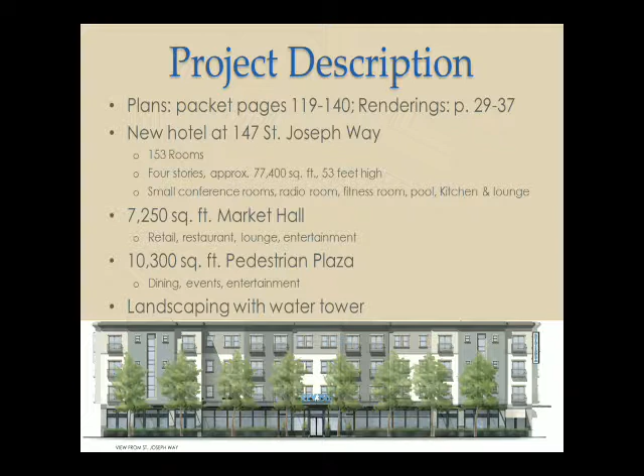The project provides parking for 167 vehicles. I should say there's 166 parking spaces out there right now associated with the Park and Ride. It will replace 30 of those Park and Ride spaces, and the parking is landscaped with shade trees and screening shrubs to prevent visibility from the roadways and public ways, and is implemented with water quality BMPs throughout.

Also, the project involves reconstruction of St. Joseph Way to conform to city design standards. It would include sidewalks and streetscaping on the hotel side of the street. It will include parking for 16 vehicles, and though it's not really part of St. Joseph Way, at the western terminus of St. Joseph Way, there's a wetland water quality interpretive area being proposed.

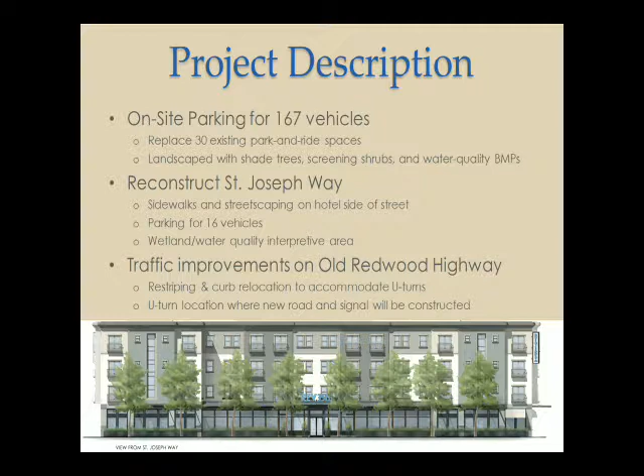As well, there are some traffic improvements on Old Redwood Highway. Part of reconstructing St. Joseph Way, as proposed, there will be a turn median where it meets Old Redwood Highway, which would allow left and right turns in, but right turns out only, so only southbound travel onto Old Redwood Highway. To allow for some northbound traffic, we've asked them to include a U-turn, and this would be at the location where there's proposed to be a traffic signal, and I'll show you more of that as we move on.

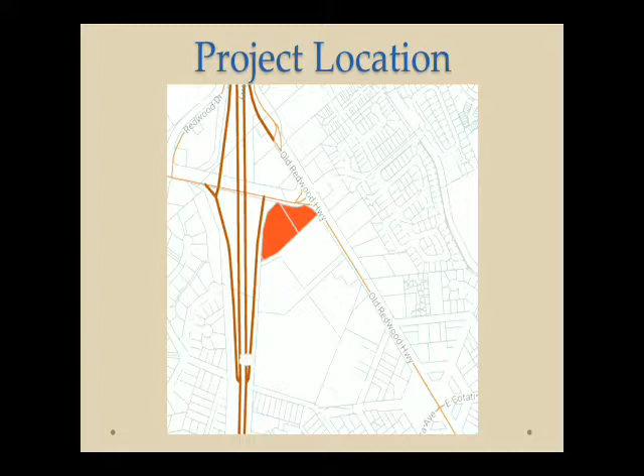So that's where the project is located, pretty much the southwestern corner of Gravenstein Highway and Old Redwood Highway. This is a view looking south, but it also shows the parking lot that exists and kind of the heavily compacted area off to the left in this aerial.

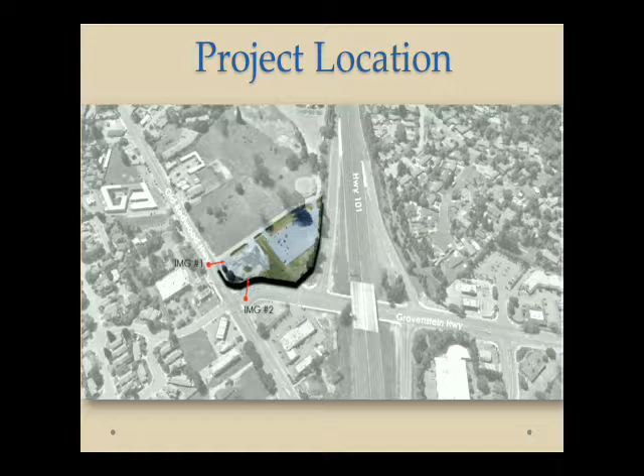Today, in this image, basically what you can see is there's two major lots, and a tiny third lot, a small triangle about 450-500 square feet in size. The majority is covered in asphalt with the park and ride lot, and the far right side is all denuded gravel. That's an old site, used to be a gas station, and Tubby's Restaurant was there. Since then, all those tanks have been removed, remediation has occurred, and the site's been cleared. But currently it's vacant, used for a Christmas tree lot the last few years.

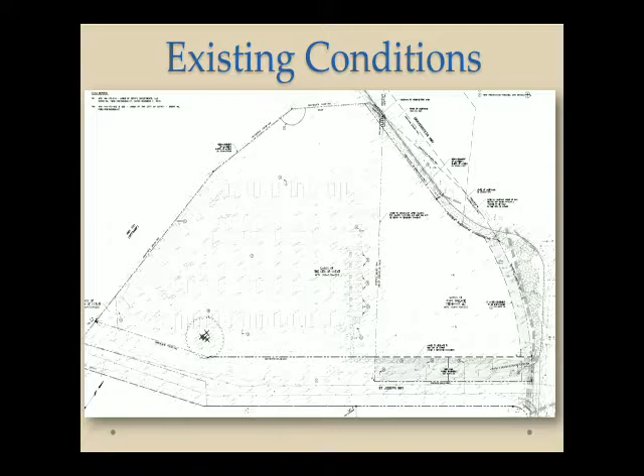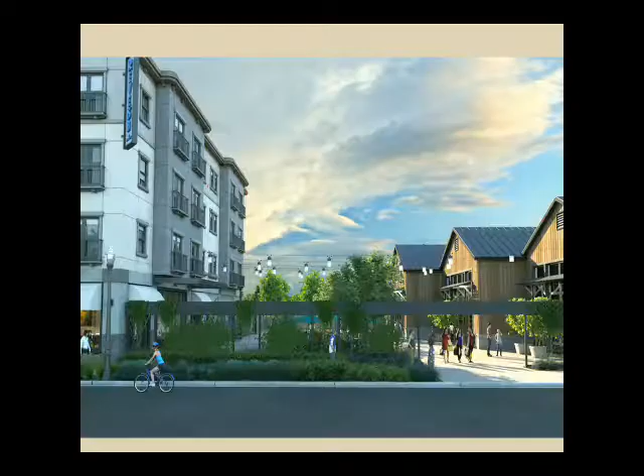This is a rendering submitted by the applicant. Basically what I'm trying to show here is how it would appear as if you're on St. Joseph Way. It has active ground floor uses in the hotel, and the market hall also has active uses such as restaurants and retail. This is precisely what's called for in the DSP, and the pedestrian plaza is also an important component of what the DSP is looking for, and that's pedestrian-oriented hotel development.

When you look at the hotel in this part, you can see some of the architecture. It's flat-roofed, uses offset planes, a series of colors, and decorative windows, and all these things help to break up the massing of the building. The barn-like structures are distinctly different, but complement the building because of the historical features utilized in the hotel itself. Also, the cornice of the hotel is done in a way reminiscent of turn-of-the-century commercial buildings, providing an attractive top to it.

Access to all of the market hall is from within the plaza. That's the way you will access those buildings. As well, from the plaza, you can access the hotel.

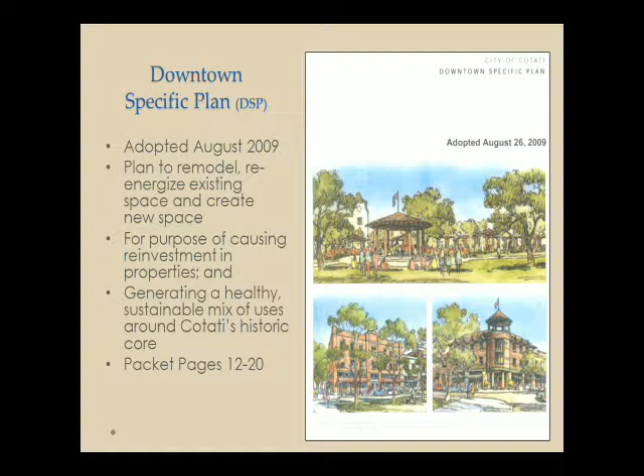Within the downtown specific plan, there's 4 planning areas. There's a historic core down to the south. There's La Plaza, around La Plaza Park. The Commerce Avenue, which is all the way to the north of this site, and then the Northern Gateway, which is this particular site, which this site is within.

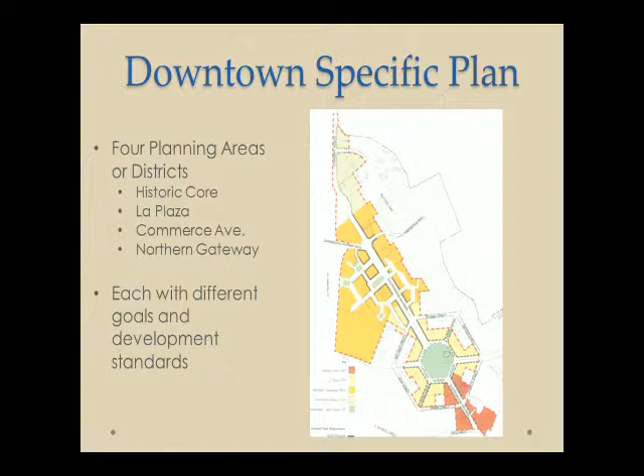Each of the different areas or districts have different goals and development standards. This one is located in the Northern Gateway. The focus, according to the DSP, is for regeneration. As I said, this once was a used site, so it's to reutilize the sites, and for revenue generation.

It quotes this: the DSP is saying this area of the plan presents the largest contiguous opportunity for a substantial revenue stream. It transforms underutilized land into a mixed-use district.

Two primary goals are to reconfigure Old Redwood Highway into a vibrant mixed-use, multimodal, and beautiful urban street. And lodging, again, is specifically called for in this district. Develop pedestrian-oriented hotel with active ground floor uses, capture sales and hotel taxes. Some of the key development standards: the maximum height allows 4 stories and has a 50-foot limit.

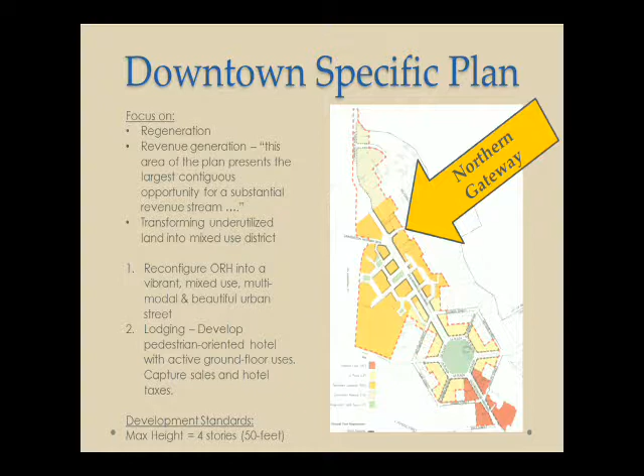Part of this proposal tonight, we're going to be talking about variances or considering variances. There are 2 variances that this project would require. One is to the block length, and we'll look at that in a moment. The DSP establishes a maximum block length of 500 feet. As proposed, the block length, the way it's calculated, is 570 feet.

And in this case, a mid-block road connection—let me just go to this next slide. But in this case, this mid-block road connection is not something we want. If you look at this site plan, there's no way to run a road to connect to the 101 off-ramp, or the Gravenstein Highway. Neither of those connections would conform to Caltrans roadway standards, nor would we want to run a road through this development.

To do so would significantly diminish the good assets of this project, including the plaza and the market hall and the pedestrian flow that it creates. That said, the pedestrian plaza does actually create a connection between Gravenstein Highway and St. Joseph Way. So the block is interrupted by a pedestrian way, which is, I think, just as valuable as interrupting the block with a road.

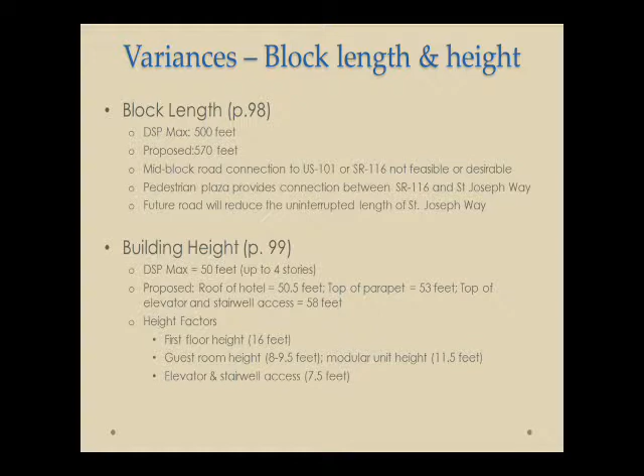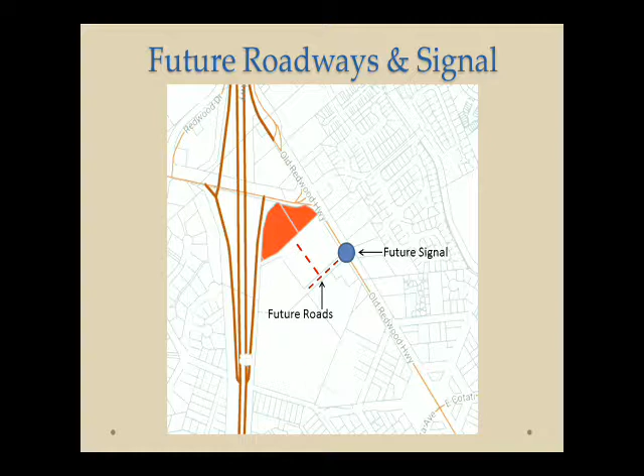So I want to say this about the property. It currently has 166 parking spaces and a 1-acre vacant commercial lot. It already has the ability, it's already been entitled, really, to build much more than what's being proposed. If we were to replace it with a gas station, which was there previously, it would generate a lot more traffic than what we're considering here.

In terms of uses that would be appropriate for this area, a hotel is really the most desirable use we can think of. It generates far less traffic than all the other commercial uses we could consider there, and less traffic than, say, a mixed-use development with homes. This is also a poor location for mixed-use development because of its proximity to all the heavy roadways.

So when the properties to the south are developed, the traffic from the hotel will also be diverted through roadways down to where this future signal will be, along with the U-turn pocket that is proposed. The developer will be installing a component of the future intersection by widening the road and putting in some of the street marking.

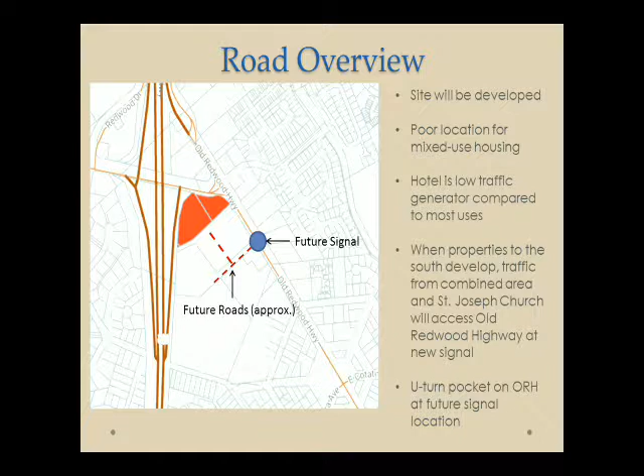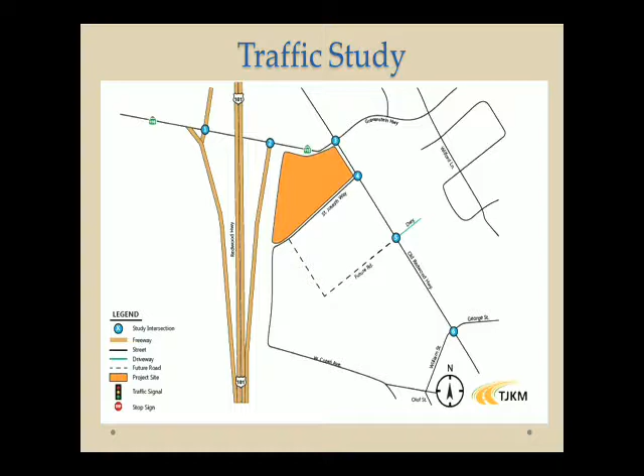The traffic study looked at 6 major intersections: the on and off ramps at 101, the St. Joseph Way intersection with Old Redwood Highway, the intersection of Gravenstein Highway and Old Redwood Highway, the location of the future road, as well as the four-way stop intersection at William and George Street.

The traffic study used a conservative approach. They actually considered the market hall as a supermarket, and studied peak hour AM and PM delays at all the study intersections. What we found is all intersections operate at acceptable levels of service with the project. William and George currently fails, but the existing peak hour delay will not exceed the significance threshold with the project. That is another location ultimately proposed for a signal, and when that signal goes in, it will help that intersection.

The right-in, right-turn-out prohibits left turns from St. Joseph Way, and then we have the U-turn pocket at Old Redwood Highway. This allows southbound traffic to make the northbound turn. It hopefully prevents cars coming down into town that want to go north from trying to find a way back north or turning around in someone else's driveway, for example.

As we stated before, use permits are required for this project: a permit for lodging/hotel, a use permit for outdoor dining on private property, and a use permit for alcohol sales with entertainment. All of these uses are permissible with a use permit, and all have been addressed through the conditions of approval, which begin on page 105 of your packet, including the mitigation and monitoring reporting program, which is part of the CEQA document.

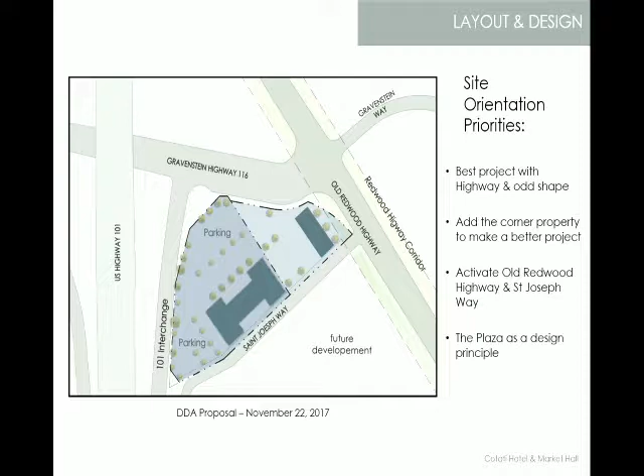So this, you've seen this image, and we'll talk quite a bit about it when I bring Christine up to talk about some of the details of the site planning and landscape improvements. But this just created a whole different project.

We think it's a nice combination of what the hotel does with its architecture and what the Market Hall did with this more agrarian look, which our firm has a lot of history with, working on projects like the Barlow. But we recognized that the plan was really telling us, with help from town staff, Damien and Vicki, that downtown is a nice mix of buildings in general. They don't all have to look alike—in fact it's probably preferred that they don't. But you start looking for connecting ideas that give them meaning to one another, creating a bigger mosaic for downtown moving forward.

I think the challenge for us as a team, and possibly for the town or city, is that this is the first significant project out of the gate. So we had our training wheels on to some degree, trying to figure out how all of this was going to work, but that's not necessarily a bad thing. It's just that sometimes we had to take a deep breath and say, all right, we're marching this way, and we don't want to be pulled that way.

So anyway, I'm going to come back up a little later to talk about the architecture and how it works, building off some of the things in the staff report. I think right now I'll bring Christine up. She can start talking in more detail, more fine grain, about how the site works and some of the other improvements we're bringing forward.

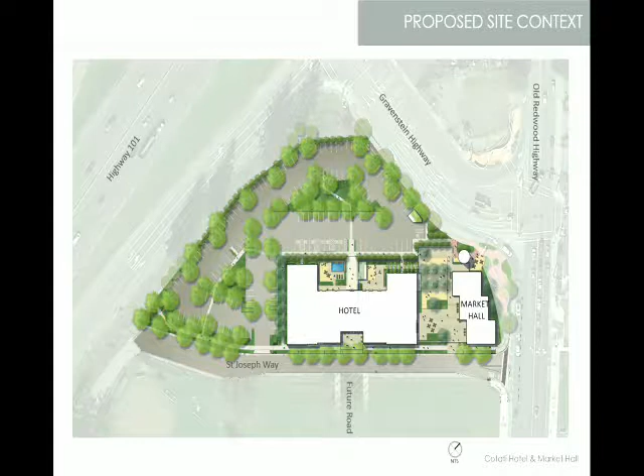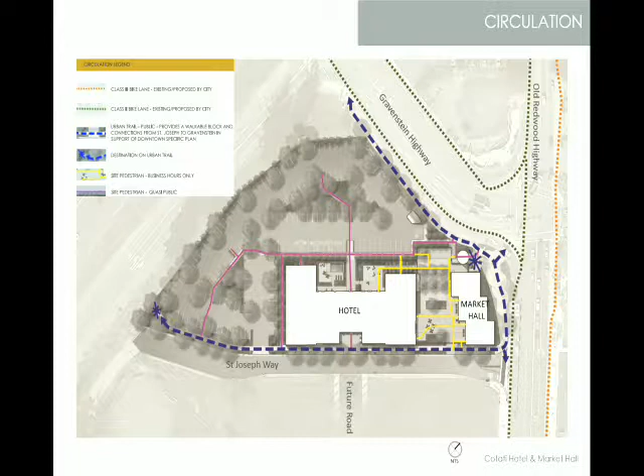There's also parking along the street. We'll have more of an urban edge with raised planters at the building to create more of that pedestrian zone for people. That's very pleasant.

Along this 101 edge, we really wanted to pull some of that agrarian feel into the site and include a hedgerow. We'll have very columnar trees amongst the oaks and redwoods that are there already, creating more of a hedgerow space for birds and beneficial insects and seasonal interest, and also to help mitigate some of the noise and pollution from the road.

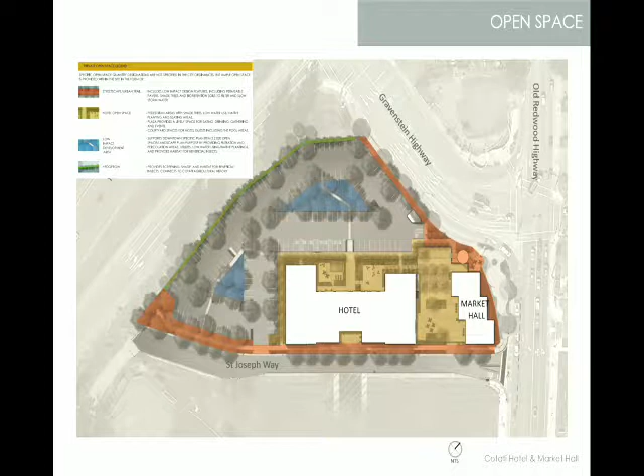Sustainability was really important, an important component of the specific plan and also your goals as the town, as a city. We've met them in several different ways.

Through the building energy, we're proposing some solar on the building itself here. The exterior lighting and the interior lighting will all meet California codes for energy efficiency and dark sky.

We provide opportunities for alternative transportation, so there'll be energy efficient vehicle parking spaces closer to the building, and we'll also be plumbing for future electric vehicles. And then, of course, all the low impact development, which helps with the stormwater and water quality on site.

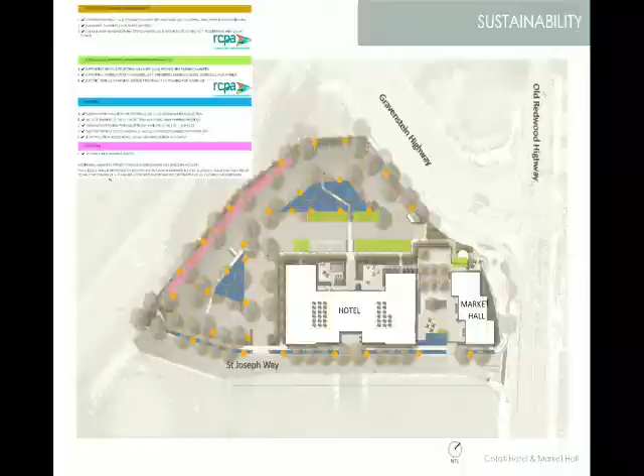I have to look at a bigger vision because there are a few other things we've included that I want to mention. One is the bicycle parking. We'll be providing temporary bicycle parking within the courtyards for people coming to use the space, in the form of bike racks. The building itself will have some covered bike parking that's more secured for employees.

We'll be planting trees, obviously, the solar I mentioned, supporting the parking policy measures for prioritized parking and the electric vehicle charging station plumbing. And the park and ride — I think that was mentioned — we're keeping the 30 park and ride places here on this edge, so that will still be in play.

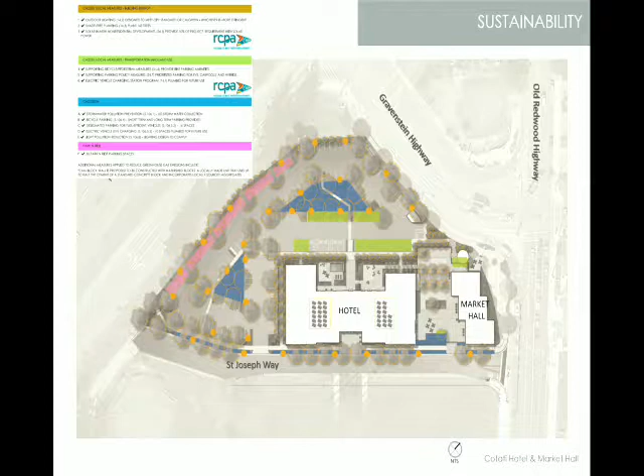Going in a little closer onto the hotel and market hall plan, specifically looking at some of these public spaces. This area adjacent to the hotel is the pool and courtyard, so that would be for hotel guests. It would have a fence along the edge so it would be secure. We'd also be proposing a wall along this edge, really to provide some sound baffling for the users.

We are proposing to use an earthen block that has less concrete, so it's a sustainable material, and it's really beautiful — they used it at the Sonoma Academy. We'd have vines on it, so it would be an amenity to the project, not just a sound wall. We'd also propose some columnar trees along this edge to provide the sound of the leaves and help provide a little separation from the road noise.

This would be the entry from the back parking lot in this area, and you would see into these spaces through a permeable fence, so it wouldn't be completely screened. You would see little glimpses into what we're calling the secret garden and the pool area, so it wouldn't feel like you're walking through a canyon. It would be this really welcoming space.

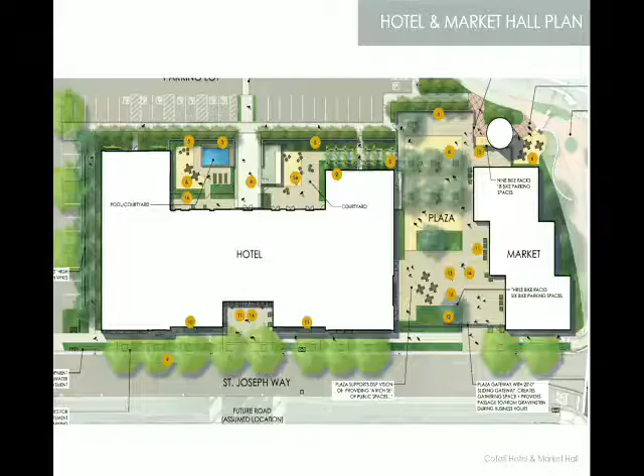That connects to the public plaza that exists, highlighted by this proposed water tower, picnic areas, and some bike parking. It's a really nice place to stop and rest. You're not obligated to purchase anything, but you could go in, grab a cup of coffee or something to drink, and be with your bike so it wouldn't walk away. We also have bike racks inside here, very secure, and also in this area, so there's lots of opportunities for bike parking.

The main entry to the hotel is off the street, and it's a generous opening. Mitch will talk more about how that building steps down to provide a little more human scale towards the street. We're also proposing street trees here and a planted buffer at the edge.

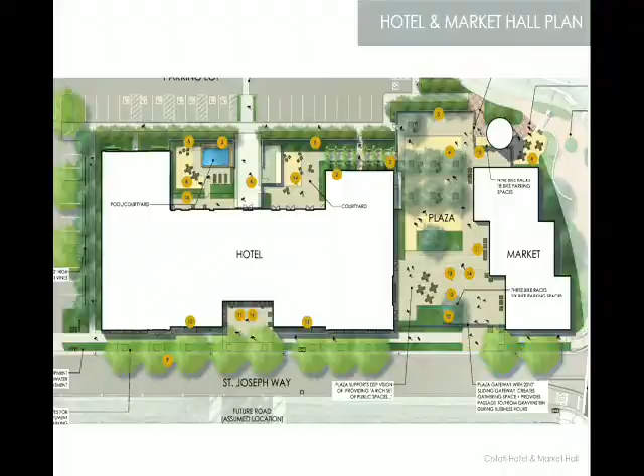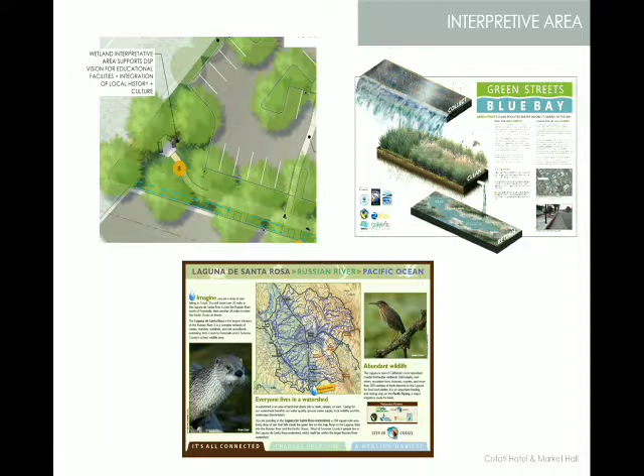This is a close-up of the interpretive area. We're anticipating a decomposed granite area with seating and interpretive signage. This photo is something you already have in town, and it's something we've prepared for a project in San Pablo. There are opportunities to incorporate not just information about the current watershed, but also about the sustainable practices being shown on site. We'd like to display that a little bit.

The parking character is a bit different—similar to something you have with the Lowe's. There'll be bioretention in the parking lot, and we've proposed a path through it. You'll have areas of taller shrubs and lower grasses. We've proposed some seating and shade trees, so it's not just a paved parking lot.

At the Gravenstein Highway edge, we've been working with city staff to create a more permeable edge. Originally we had more columnar trees lining the whole street, and they asked us to open it up, put in taller shade trees, and have lower plantings at this edge to block some of the car headlights.

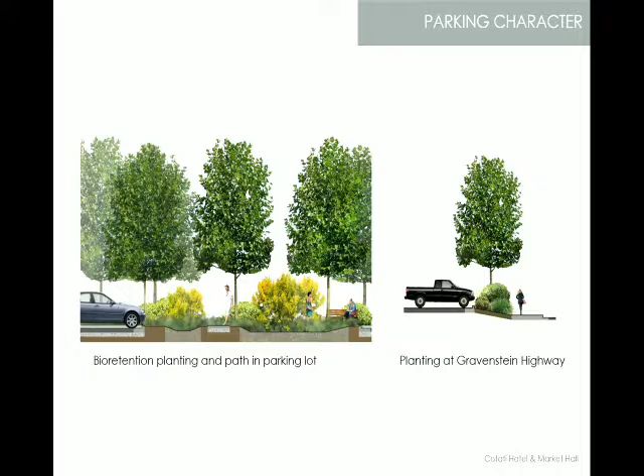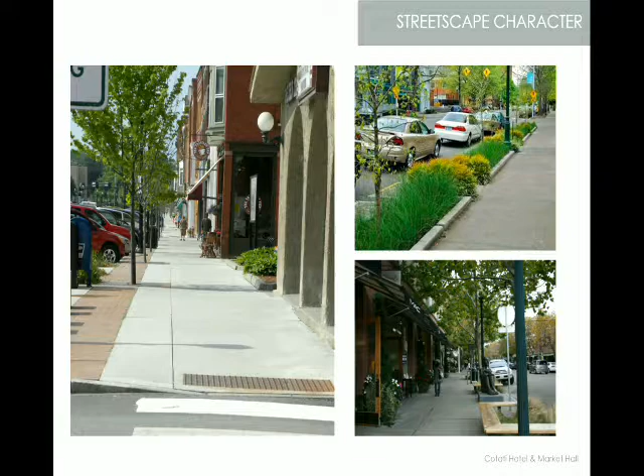Streetscape character will be more urban. There will be permeable pavers, and we'll have street trees with pavers from the parking area to the sidewalk. In our project, we'll have low-impact development in this area of the sidewalk.

The site planting character will use low-water plants applicable to our area, Sonoma County, and Cotati in particular. We're taking cues from that agrarian feel—a more open feel with hedgerows, plants with a lot of seasonal interest, a little less kempt and more wild looking in the parking areas. As we move toward the building, it'll be more tidy and refined, but still with a lot of texture and color—and of course, easy to maintain for Ken.

Now I'm going to pass it over to Mitch again to go through the architecture and the feel of the plazas.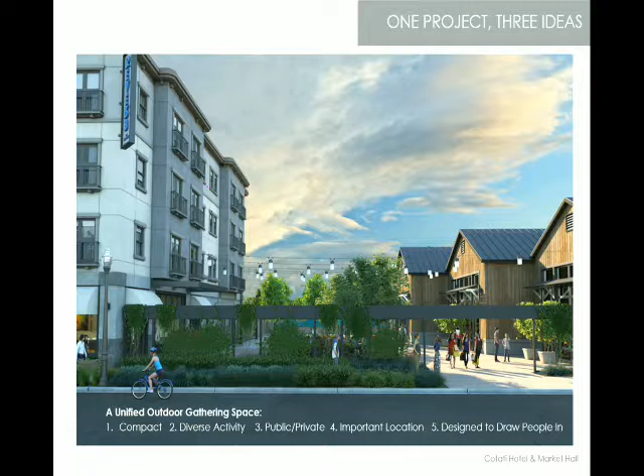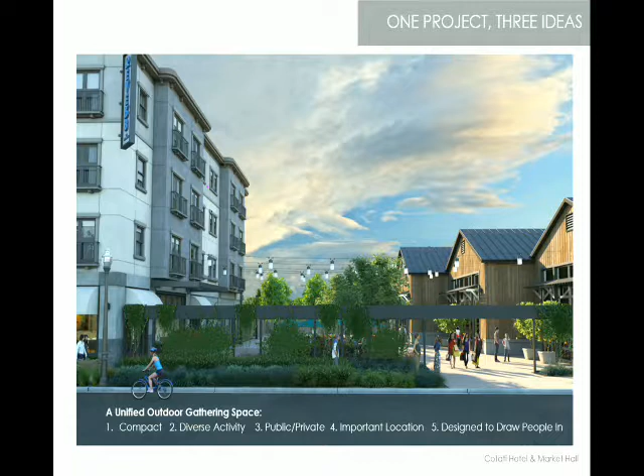So I'd like to build off some of the comments in the staff report. It was fairly detailed, and I appreciate what JB did explaining this. One of the things the downtown plan calls for is not only diversity of buildings, but diversity of open space. I think what we've accomplished here is a flex space, like Christine was talking about. It's also a bridging idea between two different types of buildings, a more agrarian wood-clad building and the Market Hall on the right. On the left you have the hotel, a more contemporary rendition of a mission revival kind of idea.

The street, the public realm, is really important. What we always try to create in town centers and city centers is a transition as you move through different scale, texture, and landscape. You'll see lighting in a minute. When you think about the positive experience you have in a city, the buildings are important, but I also like to think the buildings sometimes recede, and it's the interactive public realm, the open-air environment, that really leaves a lasting impression.

I think the way Ken is programming this space, it's going to have a lot of different character during different times of the year. And then the buildings, like I say, you'll see in a second when we look at the lighting, serve as a nice backdrop to that.

Actually, let me go back to the previous one - I'll come back to the St. Joe's image in a second. I think what's interesting about this site, the way we started to categorize it after a while, is that it's nowhere to run, nowhere to hide. There's no back aspect to the site, you see it everywhere - from the freeway, the off-ramp, 116, Old Red, St. Joe's, and coming from the town center.

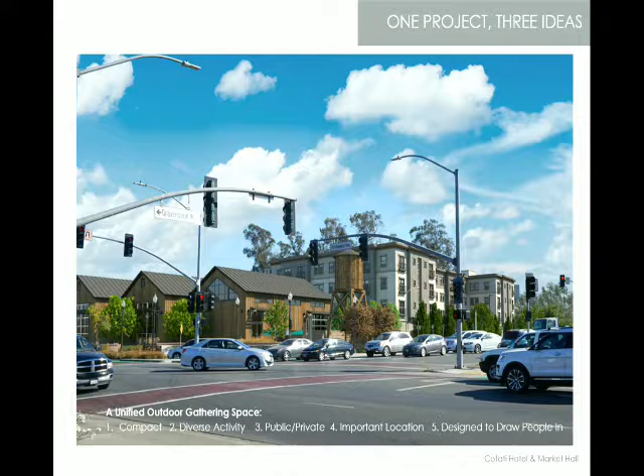I think you see this in this image, and then again here - this is 116 as you come under Highway 101, showing the long version of what the development's doing. And let's face it, if you have to look across the parking field, we've spent considerable time and energy making that as memorable as possible, both from an educational point of view with the interpretive wayfinding, and also just the way the landscaping works.

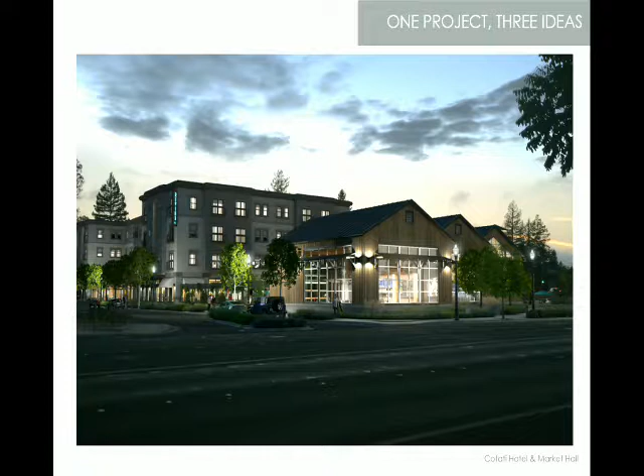What we really like about town centers and city centers is that the architecture has the opportunity to go out of character and transform itself in the evenings, and I like that a lot. I'm a big believer in what I call urban lighting. When I was a planning commissioner in the town of Windsor, it was one of my pet projects to figure out how that works, and we're still working on it. I think it's a huge opportunity to express a different kind of personality to development in general, and this project really offered a significant opportunity to do that.

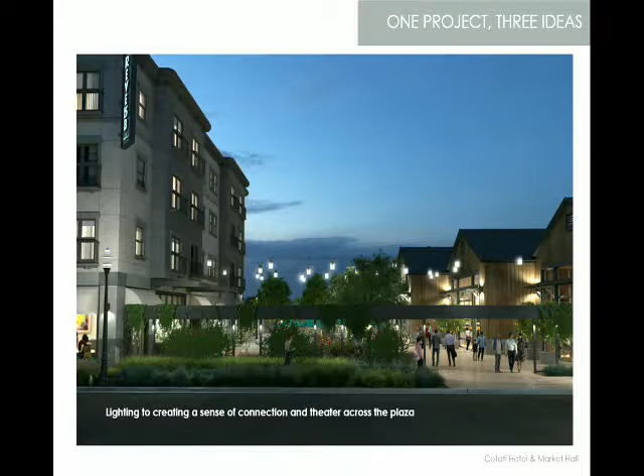So the buildings open up and you see what's going on. I think it's important that the community sees activity, not just in the public realm, but in the buildings themselves. Our lighting designer from Summit Engineers, who couldn't be here tonight, did a nice job embellishing the architecture using these lighting ideas. Same thing with the public space, the plaza - these catenary lights, the way you transition through this structure, make it very magical, kind of our little tagline here. It's very theatric, which we like, and again creates a different look and feel for St. Joseph's.

And also from the corner. So I'm going to open this up for questions unless Ken has any other comments at this point. Again, I can't express strongly enough the opportunity the city has to put a project together, using a document that's 10 years old, but to do something at this scale, I think is unique. And certainly we've had a tremendous amount of support from Damien and his staff in making that work. So we're anxious to hear your comments, and we're here for questions. So thank you very much.

So at this point, the Planning Commission will ask questions of the staff, and then after that, we'll open it up to the public to ask questions and give their input. So do I have anybody who wants to ask questions? Go ahead, Ben.

Okay, sure, I've got a few. JP referred to the market hall as two-story. I'm curious, is there really a second floor, or are we just referring to the height? There is a mezzanine inside the building. What's the difference between a mezzanine and a second floor? I would say a mezzanine doesn't cover the entire first floor. Okay, that would be how I would describe it.

Okay, thanks. The 16 parking spaces on St. Joseph's Way, is that both sides or just the north side? North side. Okay, so whatever development goes in on the south side would have the opportunity to create street parking there and count it against their parking needs? Absolutely correct. Okay, thanks.

On the Gravenstein Highway side, there's a fire access - will that also be pedestrian porous so pedestrians can move through and across the parking lot? Yes, the emergency vehicle access onto Gravenstein Way is protected with removable bollards, so no vehicle access, but pedestrian access can fully go through there, unlike today which is completely fenced all the way down towards the plaza.